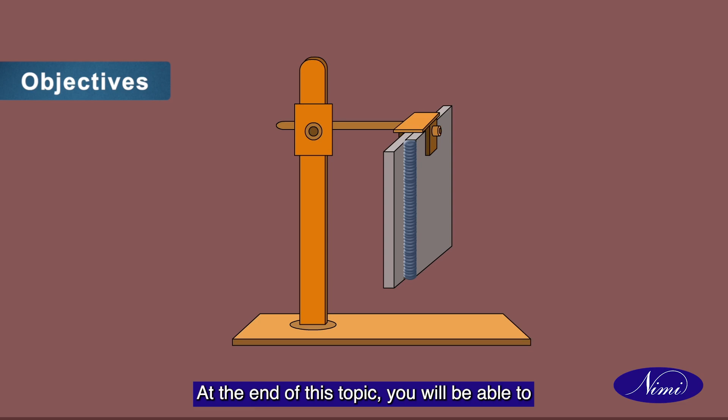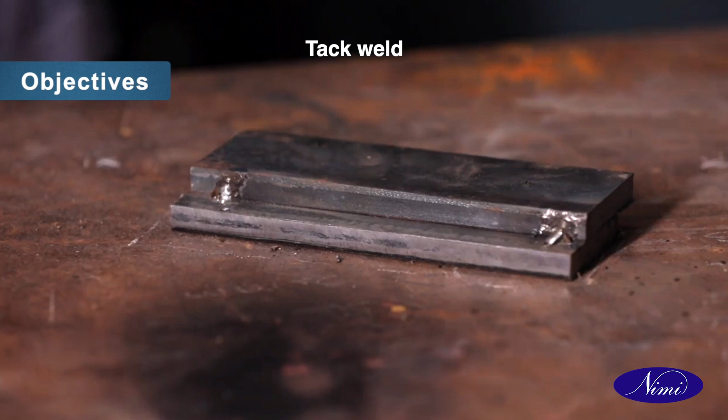Welcome students. In this topic, we will learn about lap joint on 10 mm thick MS plates in vertical position using SMAW process. At the end of this topic, you will be able to select appropriate electrodes for tack welding and welding process, prepare and set plates in lap joint in vertical position, tack weld, weld lap joint in vertical position using SMAW, and inspect the weldments for defects.

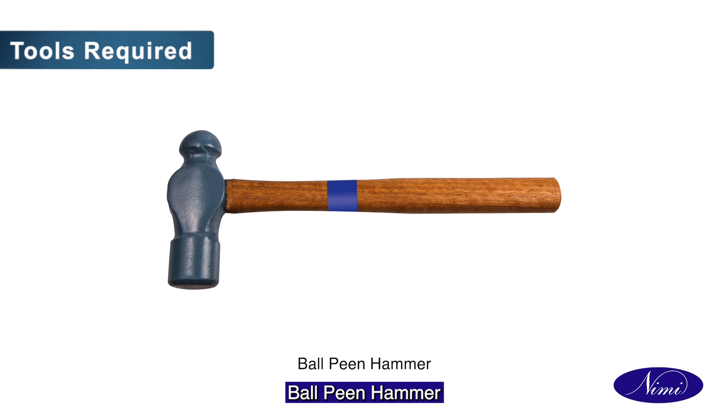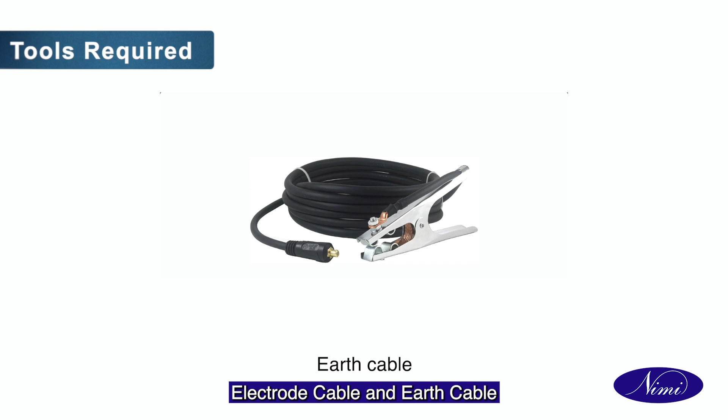Now, let us look at the tools required for lap joint on a 10 mm thick MS plate in vertical position using SMAW process: steel rule, scriber, prick punch, ball peen hammer, flat file, bench vise, tri-square, tongs, chipping hammer, steel wire brush, electrode cable and earth cable, electrode holder, electrode, personal protective equipment, SMAW welding plant machine, C-clamp.

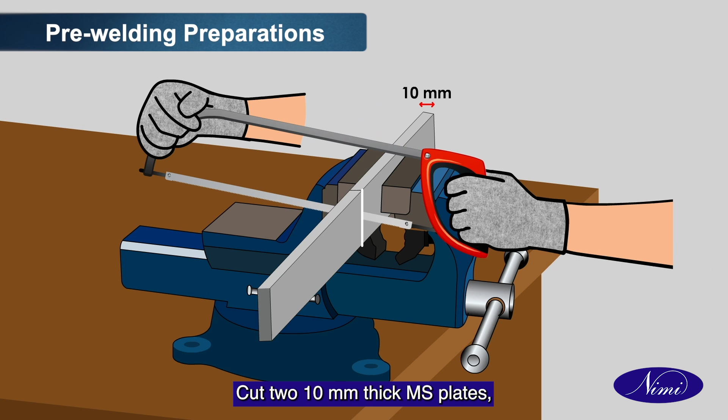Now let us see the pre-welding preparations for a lap joint on 10 mm thick MS plates in vertical position using SMAW process. Cut two 10 mm thick MS plates, 150 mm length by 50 mm width. File the edges and inspect the plates.

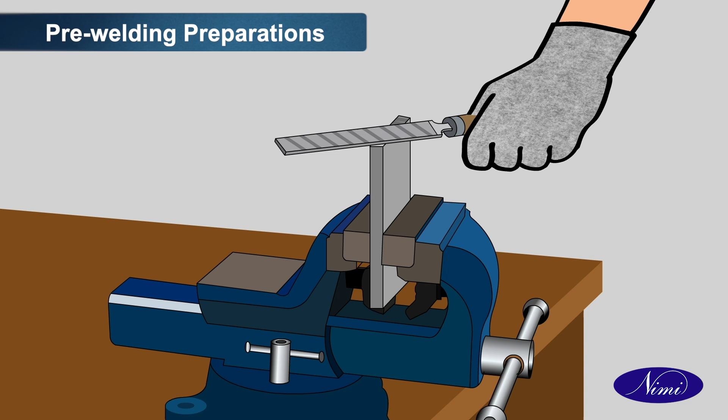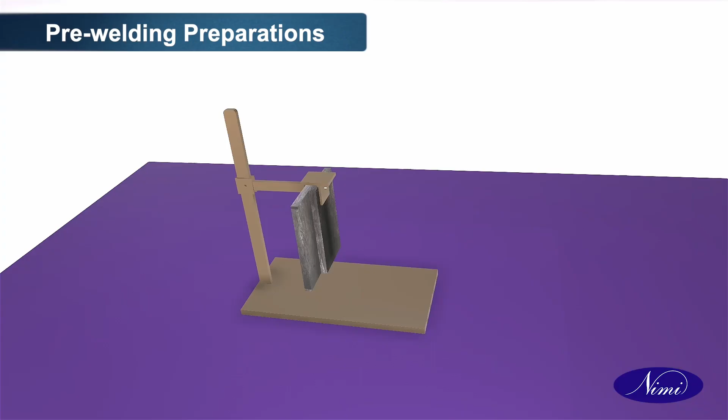Set the lap joint and tack weld them. The lapping distance should be 25 mm so that there is no gap between them after tacking.

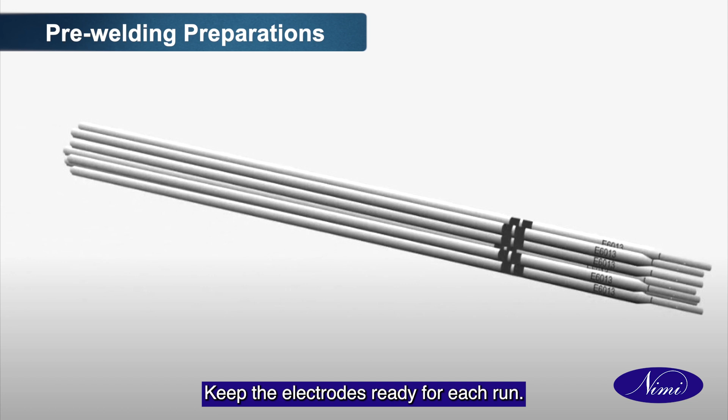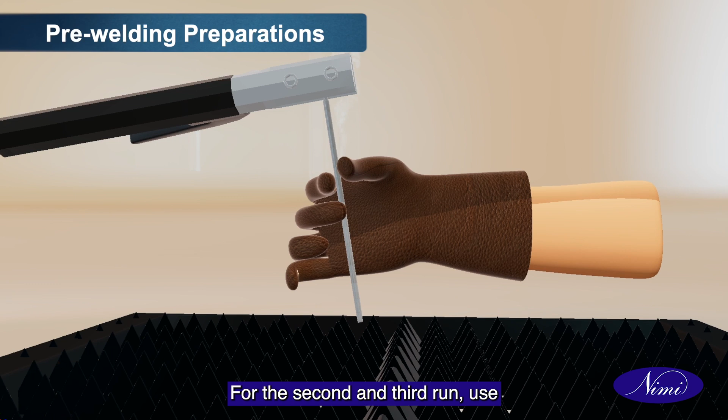Keep the electrodes ready for each run. For root run, use 3.15 mm electrode and 120 amps current. For the second and third run, use 4 mm electrode and 160 amps current.

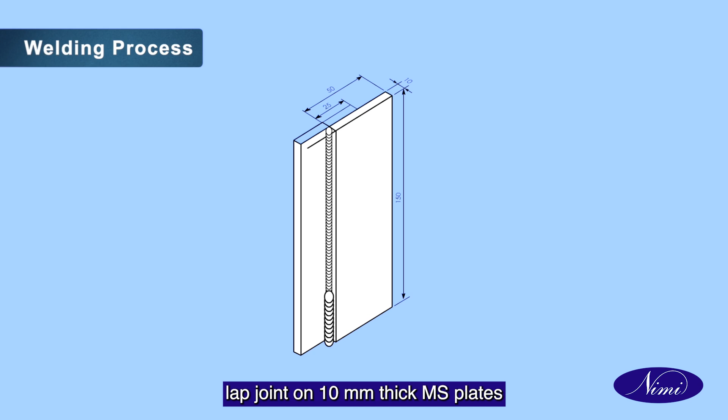We have seen the pre-welding preparations. Let us look at the welding process of a lap joint on 10 mm thick MS plates in vertical position using SMAW process. Fix the job on the welding positioner in vertical position.

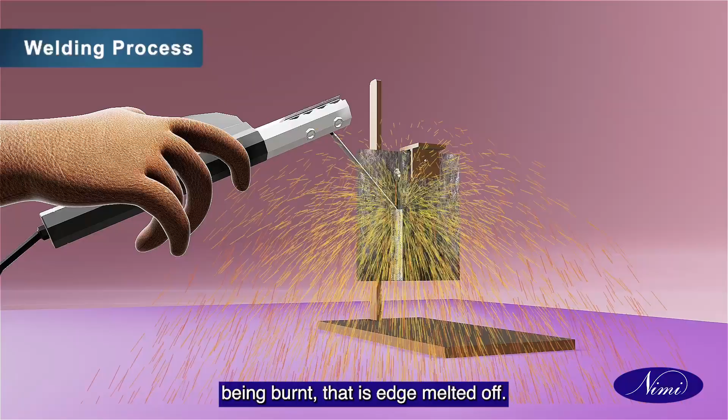Welding a lap joint in a vertical position has always been a problem, with one of the upper edges of the plate being burnt, that is, edge melted off. This can be overcome by using proper electrode manipulation.

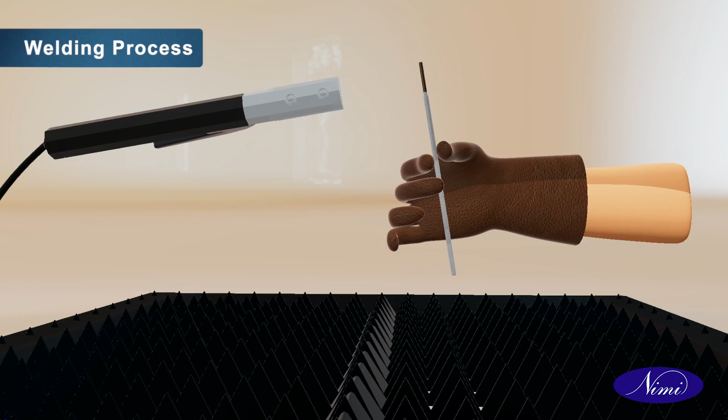Method of depositing bead in vertical position on a lap joint: use 3.15 mm electrode with 110 amps current. Use a short arc for depositing root run with whipping motion so as to prevent sagging of the weld metal.

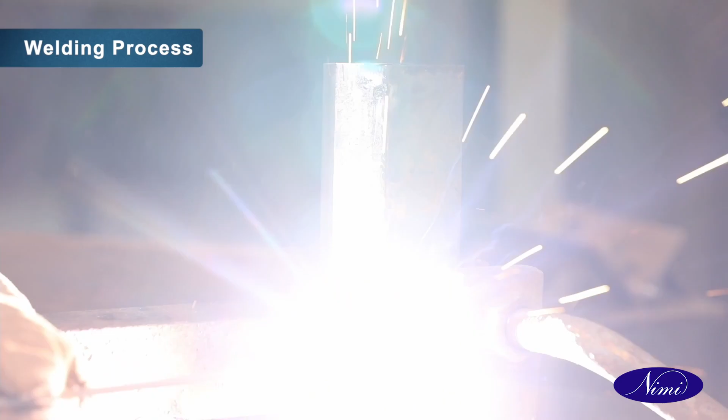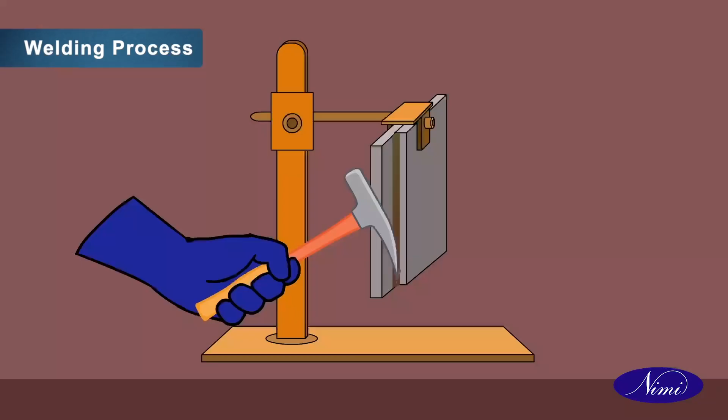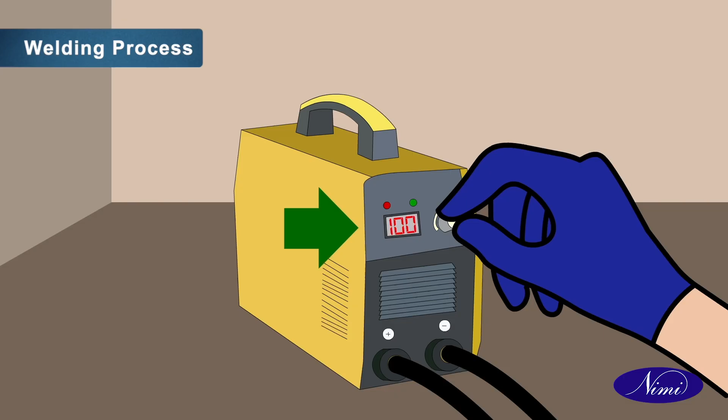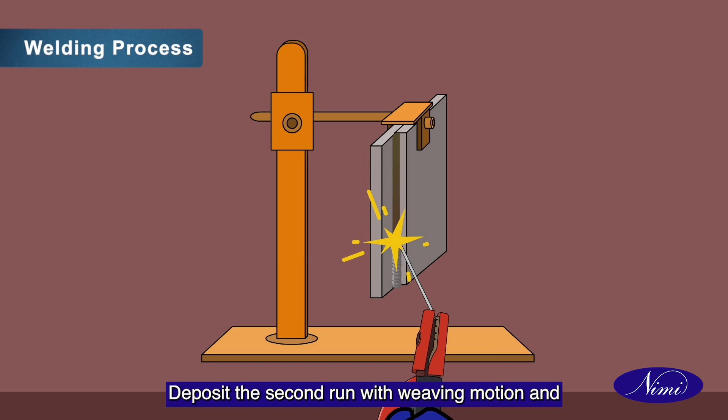Deposit the second run with weaving motion and this will avoid sagging of the molten metal. The angle of the electrode should be between 75 degrees to 80 degrees.

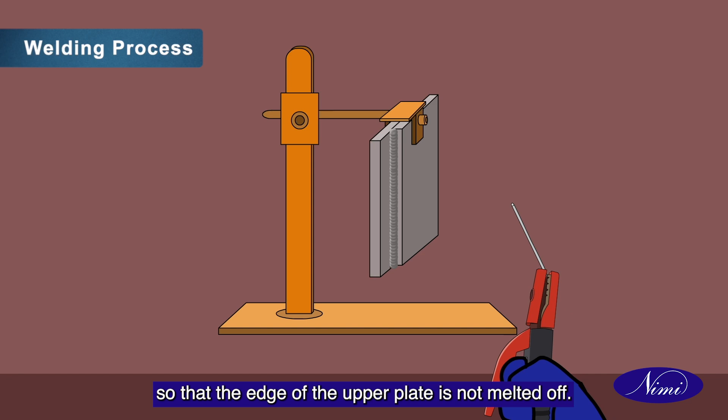Keep the electrode motion confined to the weld width so that the edge of the upper plate is not melted off. The weaving motion and the movement of the arc in the upward direction should be at uniform speed.

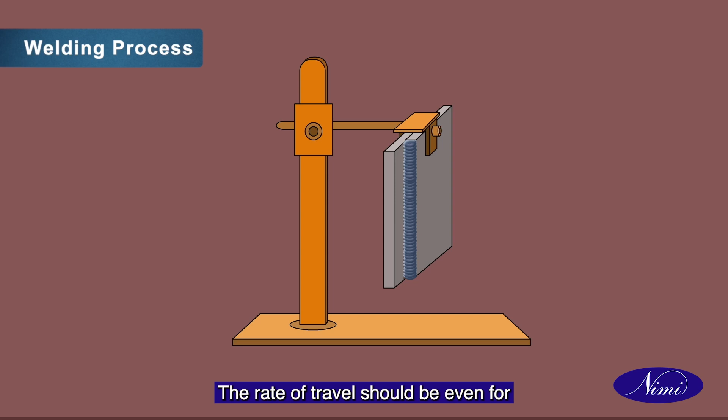The rate of travel should be even for obtaining a uniform bead with a good appearance. Ensure the correct fillet size with proper bead profile is obtained.

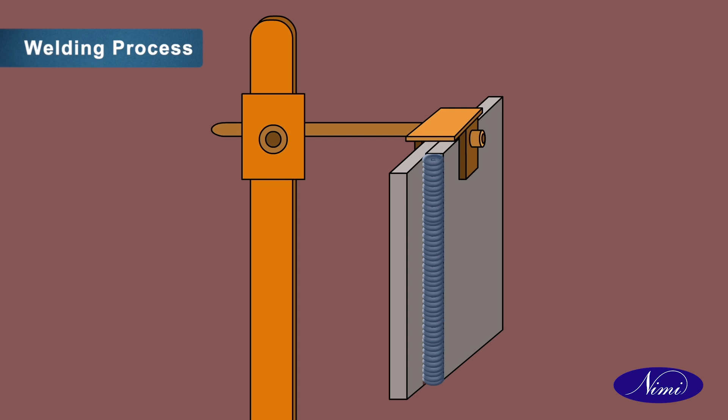Clean the joint using a wire brush and inspect for any external defect. Remove the job from the vertical position after filling the crater.

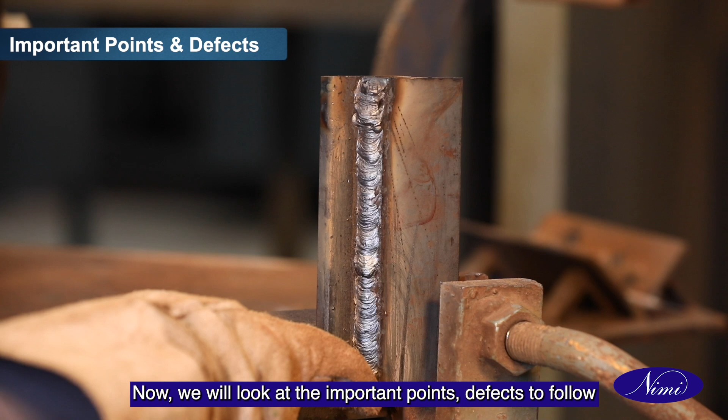Now, we will look at the important points, the defects to follow for a lap joint on 10 mm thick MS plates in vertical position using SMAW process.

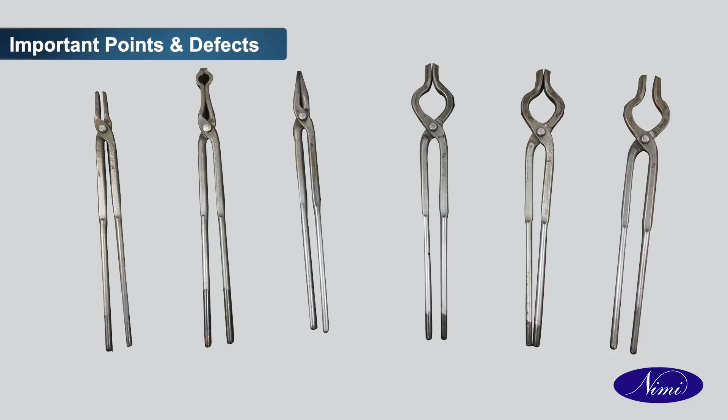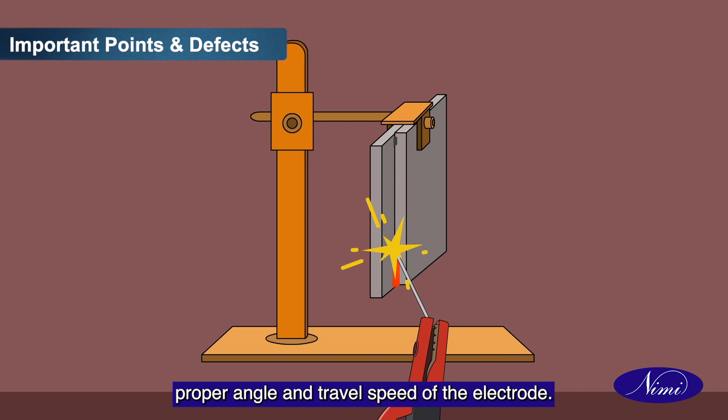Wear protective clothing. Use tongs to hold the hot weld. Maintain short arc length. Avoid over deposition and side undercut by using a proper angle and travel speed of the electrode.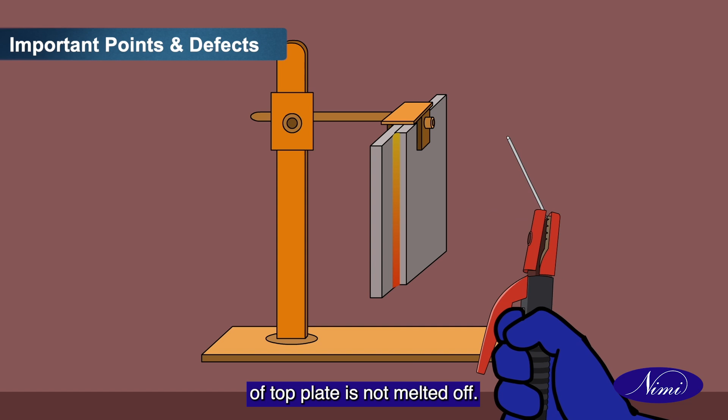Ensure the correct fillet size with proper bead profile is obtained and the edge of top plate is not melted off. Do not break the arc while moving in the upward direction.

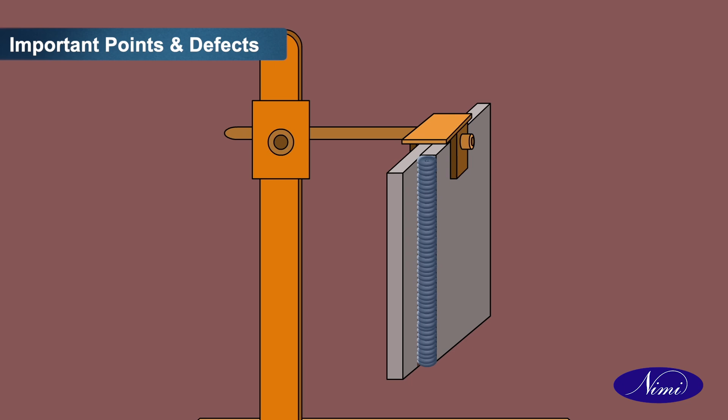Ensure that there is no undercut at the toe of the weld on the bottom plate. Overlapping distance should not be more than 3 times the thickness of the base metal.

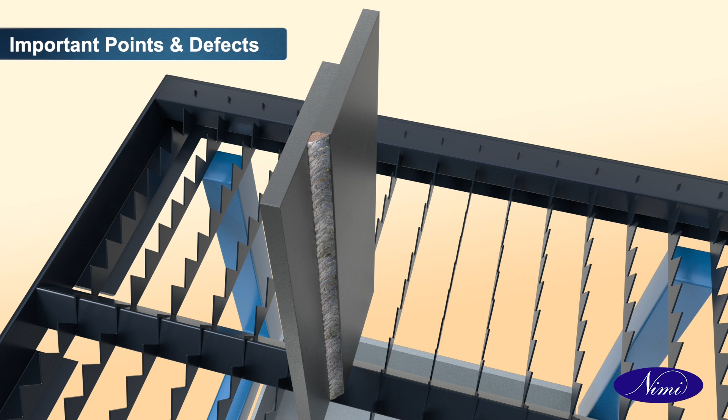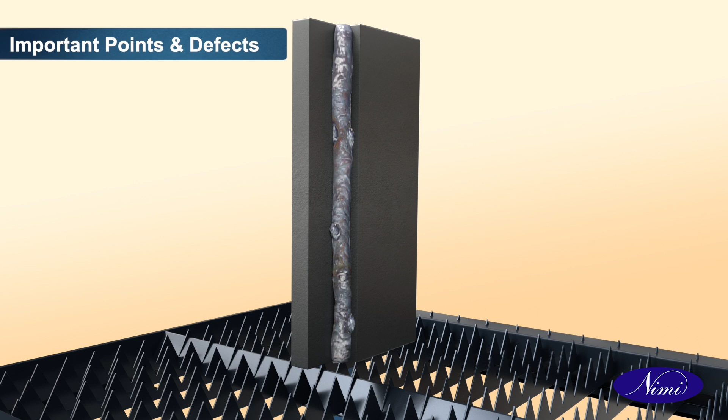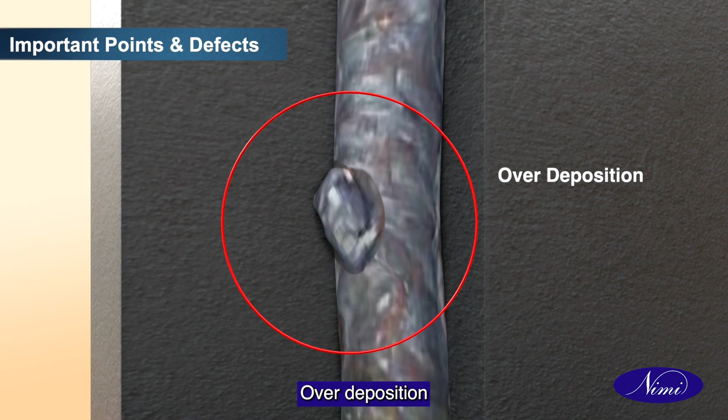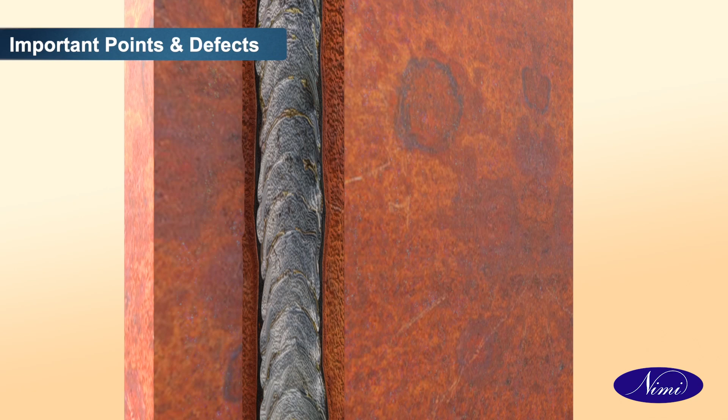Let us look at the defects which can be identified during the inspection process: slag inclusion, over deposition, undercut, lack of penetration.

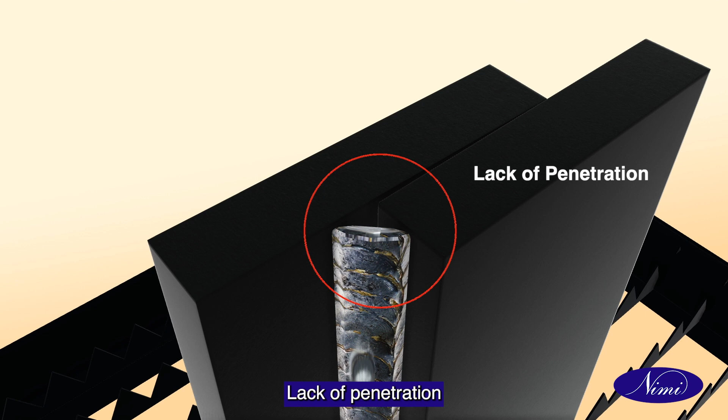Recap. In this topic, you have learned to control the sagging of molten metal with an oscillating motion of the electrode, deposit root run to ensure fusion and penetration in the lap section, and weld by depositing a second run on the lap joint without the edge of the plate melting off.